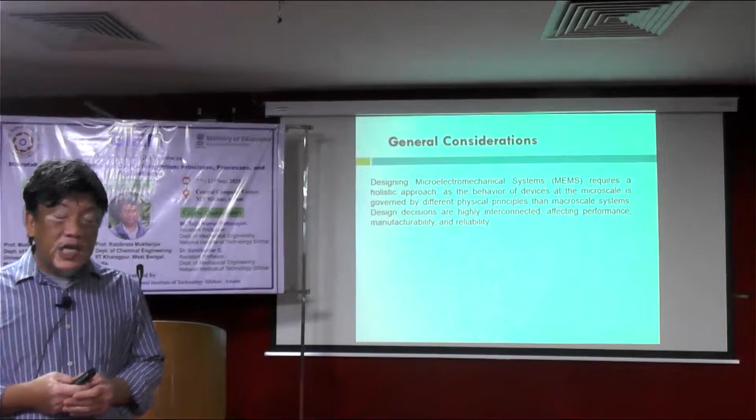As discussed previously, we know that at the micro scale or nanoscale, Newtonian mechanics does not function as what we understand at the macro scale. So at the micro scale or nanoscale, if we do not consider accordingly, we won't get the intended performance of the device, because some of the properties of the material change at the micro scale, and we don't get the exact property as at the macro scale. Then the intended device performance won't be obtained.

So then we have to look firstly at the material selection. The choice of materials fundamentally dictates device performance, fabrication process, and reliability. Just now we had a look at silicon itself. Silicon is the most common MEMS material due to its well-established fabrication process inherited from the semiconductor industry. It is lightweight, has excellent mechanical properties, elastic, no creep below 800 degrees Celsius, and allows for integration of electronics on the same substrate.

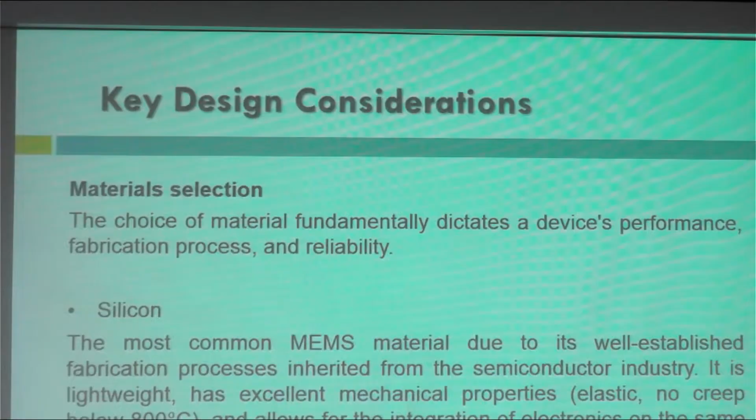I've been talking about making a circuit design on top of the silicon substrate. So this is the meaning here. The integration of the electronics or the electrical circuitry on the substrate itself is important. In macro scale devices, we can have the electric circuitry with wired winding on the device, or an electronic circuit outside of the device, etc. But for micro scale devices, we need to layer the electrical circuit on the surface because we want to maintain the small structure and make it accessible for the small places of the intended application.

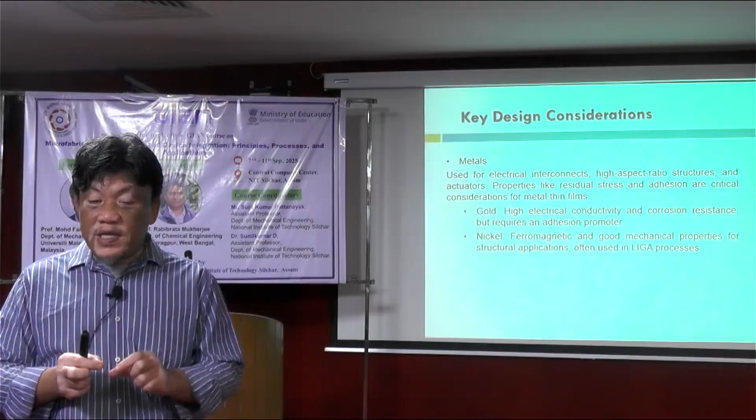Single crystal silicon is highly stable but anisotropic, with properties that vary based on crystal orientation. Polysilicon is a versatile material used for structural layers in surface micromachining. Its properties depend on deposition conditions. Metals are used for electrical interconnects and, as we have discussed, high aspect ratio structures. High aspect ratio means, let's say, long-standing materials, where the width and the length are very different in size.

Properties like residual stress and adhesion are critical considerations for metal thin films. For example, gold has high electrical conductivity and is corrosion resistant, but requires an adhesion promoter. As we discussed, if we use chromium, we can get good adhesion with the surface. Nickel is ferromagnetic with good mechanical properties for structural applications, often used in the LIGA process.

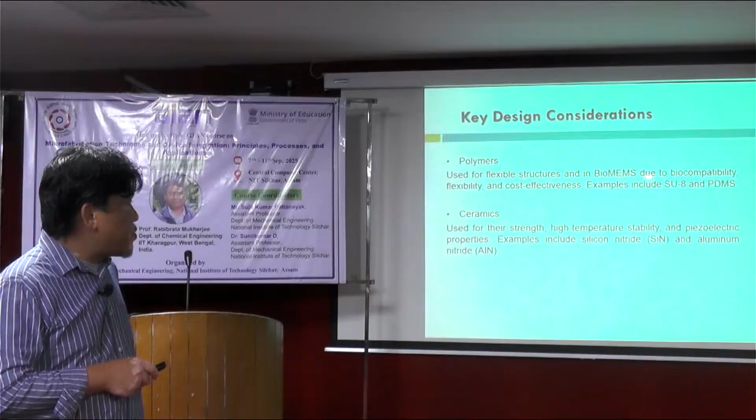Polymers are used for flexible structures and in BioMEMS due to biocompatibility, flexibility, and cost effectiveness. Examples of polymers are SU-8 and PDMS. These are quite common materials in MEMS and BioMEMS applications. You can make a structural design using this kind of material because of its high viscosity. Ceramics are used for their strength, high temperature stability, and piezoelectric properties, for example PZT, PbZrTiO3. Examples include silicon nitride and aluminum nitride.

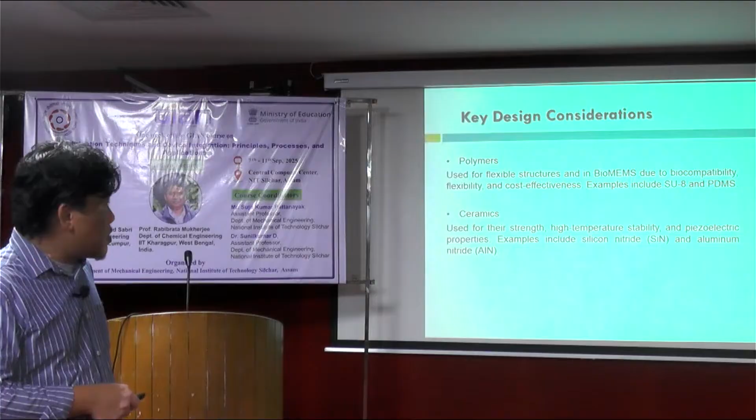Another consideration, which we have gone through in a previous class, is scaling laws. When we design something at the micro scale, as I keep mentioning, at the micro scale physical phenomena scale differently with size, meaning that a design cannot simply be scaled down from the macro world. If you think that you design something at the macro world, then just shrink everything and it will work as it does at the macro world, you are wrong, basically. You have to alter the design and consider different materials to make it work, because the properties change significantly when you scale down in size.

Surface to volume ratio: as devices shrink, surface area dependent forces such as friction, adhesion, and surface tension become dominant over volume dependent forces like inertia, mass, and weight. This is critical for actuators, microfluidics, and heat transfer.

So we had a look yesterday at how the properties of the material are affected when you scale down the size. Some properties change 1,000 times. For example, force changes 1,000 times when you make the device 10 times smaller in size. That significantly reduces the forces that can be exerted by the device itself. Then you need to think about how you can get sufficient forces if you design something small.

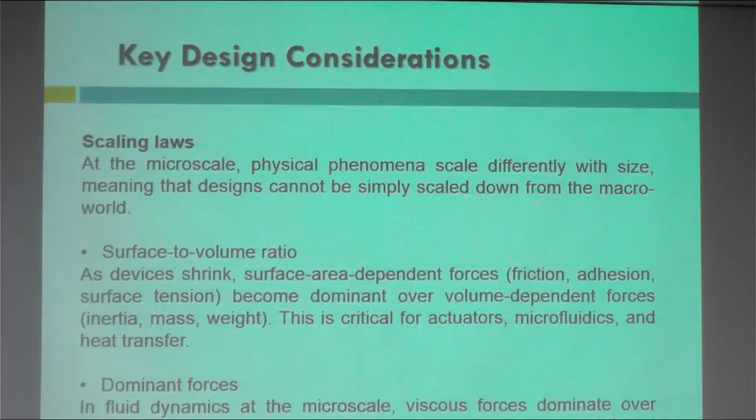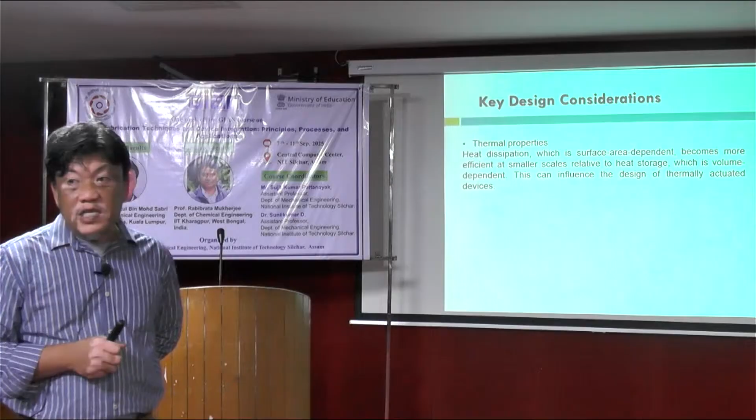And thermal properties: heat dissipation, which is surface area dependent, becomes more efficient at smaller scale relative to heat storage, which is volume dependent. This can influence the design of thermally actuated devices. For example, when I showed you yesterday the inkjet ejection of liquid with a thermally actuated actuator, if it's very small, you can heat up the materials quite fast. Deforming the material at a faster rate makes it possible to use a high frequency inkjet printer.

But the thing is, at the small scale, you can heat up something quite fast, but the heat will also disperse quite fast. So those are the things that need to be considered in the design related to thermal properties of the material.

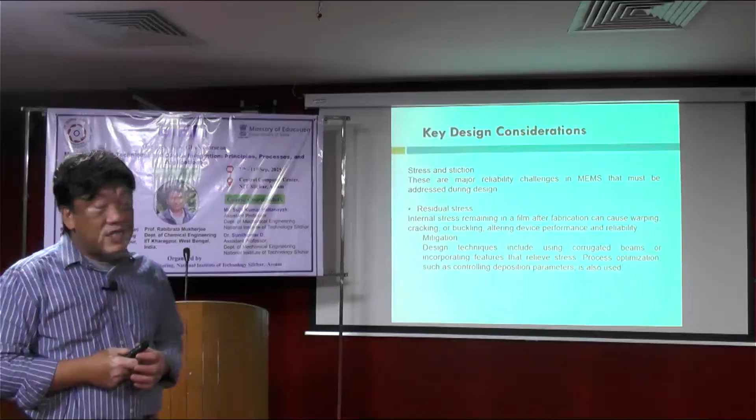And stress and stiction. These are major reliability challenges in MEMS that must be addressed during the design. The stress on the structure is different. And stiction means it tends to attach to the surface, so it sticks. Something very small easily sticks to the surface of a material, so stiction prevents things from moving. That is something you need to consider when you design a very small device or structure.

And residual stress: internal stress remaining in a film after fabrication can cause warping, cracking, or buckling, altering device performance and reliability. As I mentioned in the previous lecture, residual stress depends on the fabrication process parameters as well. If you want to reduce or mitigate the residual stress, design techniques include using corrugated beams or incorporating features that relieve stress, and process optimization, such as controlling deposition parameters, is also used.

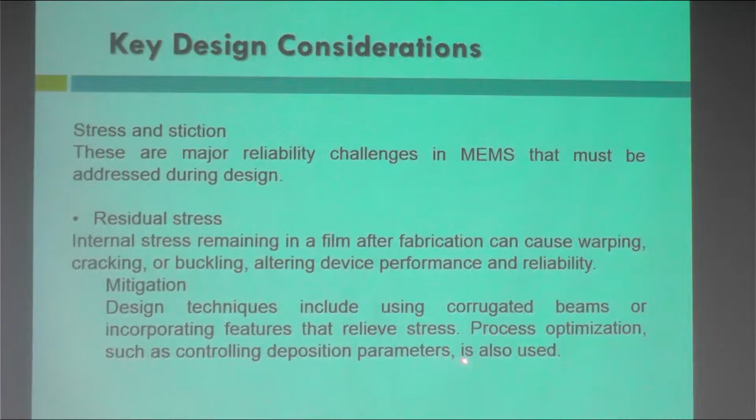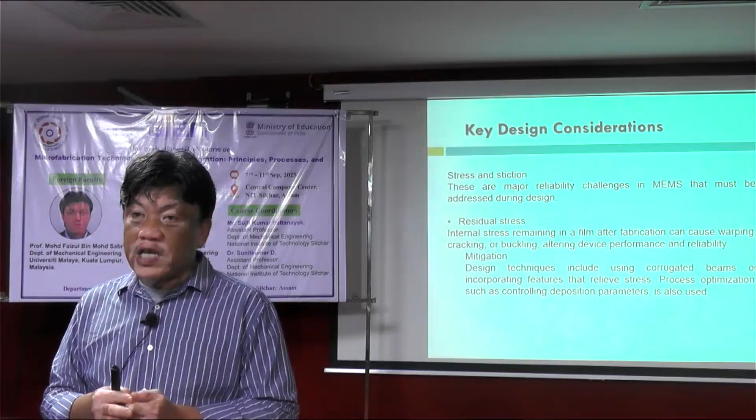So this is what I've mentioned before. This needs to be a recipe that is already established, or if it's a new process, we need to optimize the process itself in order to get low residual stress materials or acceptable residual stress.

And stiction, the unwanted adhesion of released microstructures to the substrate or other parts due to surface forces. It is a primary cause of device failure. When stiction happens, your actuator may not be able to release from the surface, for example, because it's stuck or kind of glued to the surface. That is the thing we have to prevent.

The mitigation: surface modification, applying anti-stiction coatings, for example hydrophobic monolayers, can reduce surface energy and adhesive forces. Surface texturing, increasing the surface roughness, reduces the contact area between components, thereby reducing stiction. And mechanical design, incorporating spring-like structures or bump stops, can prevent stiction upon contact.

Let's say you have an actuator that forces something to go to a certain surface. If it touches, you have a spring property of the material to come back to its original position. That is one strategy in terms of mechanical design.

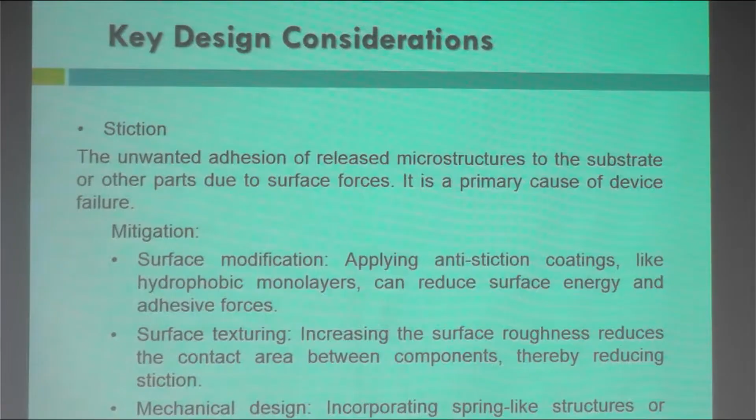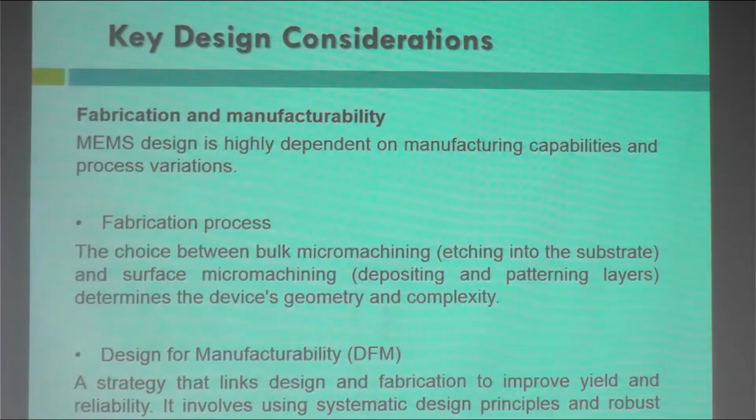And another key consideration is fabrication and manufacturability. So how easy you can fabricate, how difficult it will be if you choose certain design or certain materials. So MEMS design is highly dependent on manufacturing capabilities and process variation. So in MEMS design, basically you have a number of processes that are already established within the use of semiconductor. So you try to use these processes as far as you can in order to prevent unnecessary hassle.

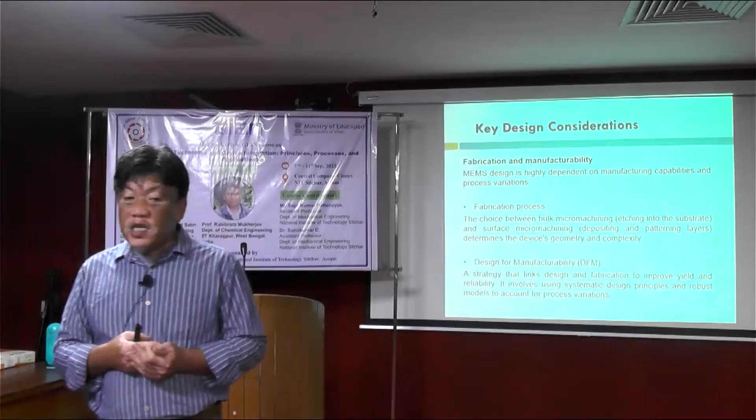In the machining process, for example, you use forces in removing materials. Let's say you do drilling, you do cutting using a lathe, for example. But for MEMS process at the small scale, we can say that the MEMS devices are fragile in comparison with the macro scale devices. So you want to avoid the application of forces to the materials as much as you can. So you want to stick with the processes already established within the semiconductor process in order to make sure that you can fabricate the materials or the device successfully.

So fabrication process, I mean, once we design the device or the micro devices, we have to have in mind the process flow, what to do and how to create what kind of structure. So that will make sure that the device will go through the semiconductor process which is already established, without going into, let's say, a mechanical process of drilling, etc.

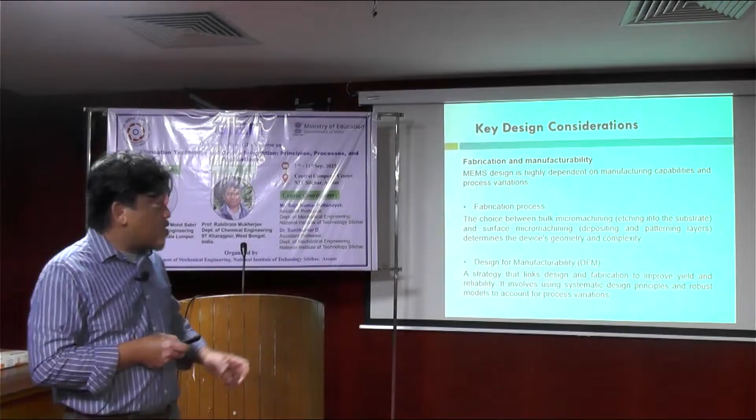So fabrication process: the choice between bulk micromachining, etching into the substrate, for example, and surface micromachining, depositing and patterning layers, determines the device geometry and complexity. So because it's a small scale, it's always complex devices. You cannot simply handle the microstructure by hand, but you need to handle it with care. In terms of process, most of the time we need to see under the microscope because of its small structure. So the naked eye will be difficult.

So that's where you need to design accordingly, even if the structural design is difficult for you to fabricate, basically because the origin of the MEMS process is basically semiconductor process, which is surface micromachining, or 2D. So design for manufacturability is part of the consideration, a strategy that links design and fabrication to improve yield and reliability. It involves using systematic design principles and a robust model to account for process variation. So sometimes a certain process does not work, and sometimes you need to redesign your process steps in order to obtain a certain structure.

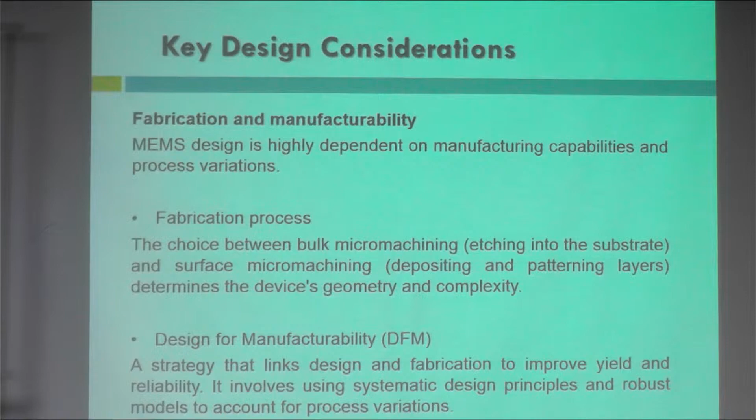So process imperfection, manufacturing tolerance, such as variation in beam thickness or photolithography alignment, can impact device performance. Designers must model these imperfections to predict their effects. By design, let's say we want to produce a 50 micrometer thickness of beam. But in the process, we have to go through masking, etc. Sometimes the process parameters are not as accurate as what we want, then there is a variation, and we cannot obtain the size as intended. The 50 micrometer might be 40, less than what we want, or it might be bigger, maybe 60 micrometer in thickness of the beam. So we have to consider this kind of variation when we design something.

But sometimes the process is well established. We know that if we want to obtain the size of 50 micrometer, we have to design the process flow, the masking, etc., slightly bigger. For example, if you want to obtain the final beam size of 50 micrometer, you have to make your photomask design like 55 micrometer, slightly bigger. So that might be something an experienced MEMS fabricator can do.

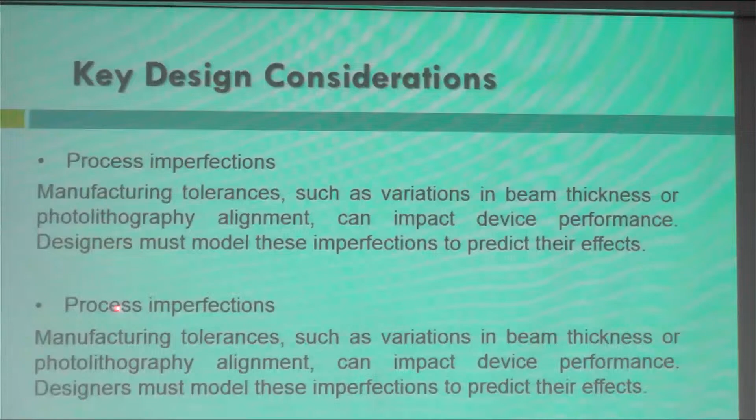So packaging: unlike macro devices, MEMS often require special packaging to function properly while protecting sensitive components from the environment. So as I mentioned before, MEMS need to be packaged because of their small nature.

You want to prevent it from a shock, you want to prevent it from the environment, for example, to protect it from even dust, then you need to have a proper packaging. Functional requirement: the packaging must allow for sensing or actuating functionality of the MEMS device, which often means exposing it to the external environment. This creates a conflict with the goal of protecting the internal electronics. So this kind of trade-off you have to consider.

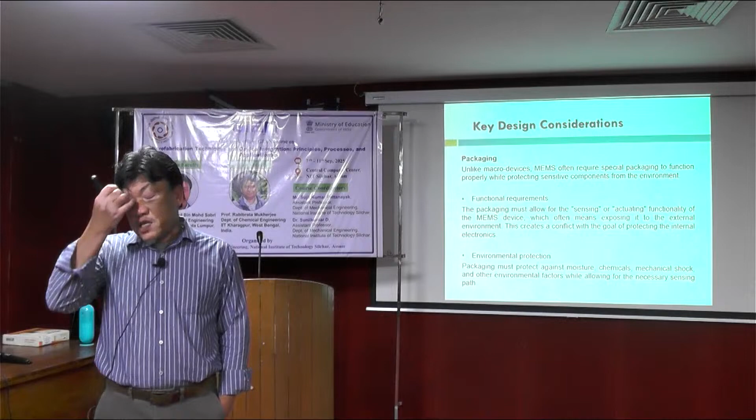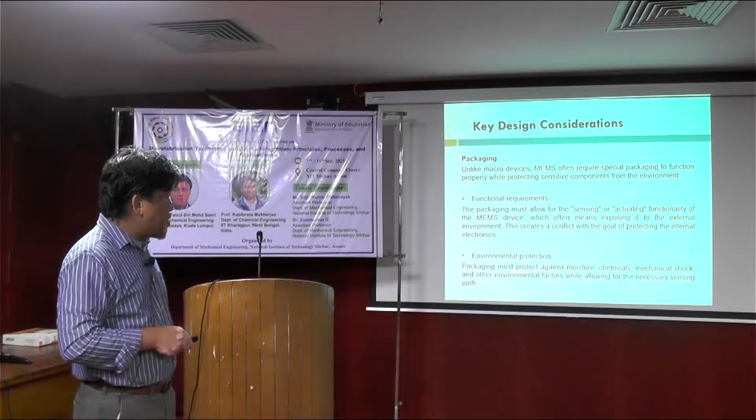You want it to function. Let's say your MEMS speaker, for example, some parts need to be exposed so that it will behave like a speaker and you can hear the voice, but to a certain extent, some of the small parts you need to protect with the packaging. So that kind of thing needs to be considered. And environmental protection: packaging must protect against moisture, chemicals, mechanical shock, and other environmental factors while allowing for the necessary sensing path.

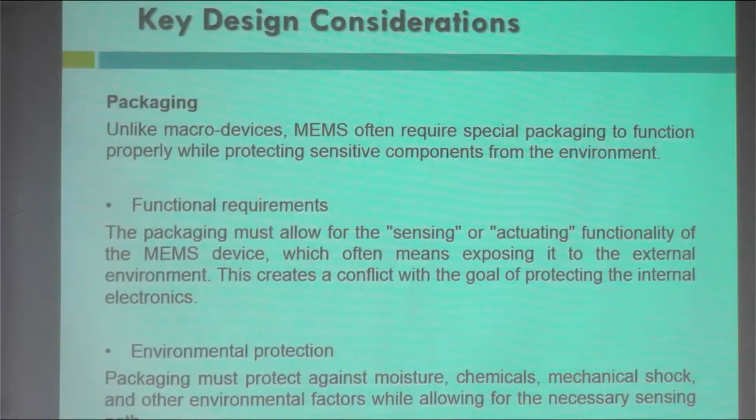Another design consideration is the material properties. We have been talking about this as well. Coefficient of thermal expansion: a mismatch between the MEMS die and package material can induce significant mechanical stress and affect performance. Material selection for packaging must minimize this mismatch. So you have different materials. Let's say your packaging is something like polymer. Polymer does not expand that much. And some parts of your MEMS device might use certain metals as the structure, and the expansion of the metals is higher with temperature.

So this mismatch of thermal expansion will create stress to the packaging and to the microstructure of the device itself. So this kind of material mismatch in terms of thermal properties needs to be considered, on how you can release it or make sure it won't break when it happens, or in a controlled environment of the operation. And package type options range from standard, cost-effective, full mold packages for consumer products to more stable, higher performance cavity or hermetic packages.

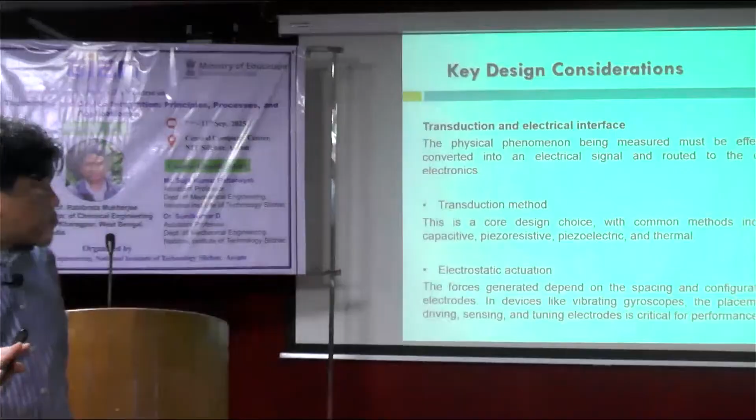So in application, if you want to move something, it becomes an actuator. But if you want to sense a movement with capacitive, you can sense how much it moved. It goes the same with piezoresistive, piezoelectric, and thermal. We know that piezoelectric will have a sensing property. When you provide electrical current to the piezoelectric material, the material will expand and it becomes an actuator. But if you apply strain to the material, you can get sensing because it induces electricity. It's the same with thermal.

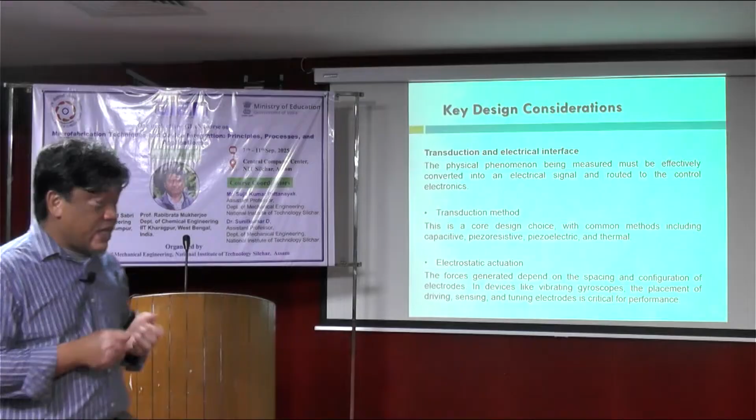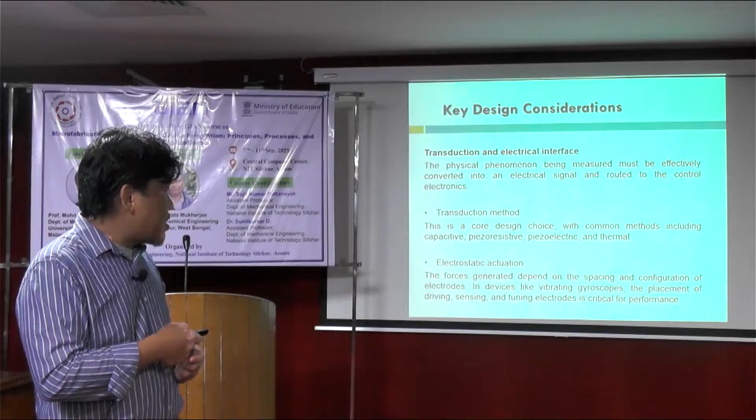Electrostatic actuation: the forces generated depend on the spacing and configuration of electrodes. In devices like vibrating gyroscopes, the placement of driving, sensing, and tuning electrodes is critical for performance. I think we had a look yesterday at electrostatic actuation and some examples of the comb drive actuator. A comb drive is basically an electrostatic actuator. With a comb drive, you can have different configurations for getting the electrostatic forces. With more integrated comb electrodes, you can have higher forces.

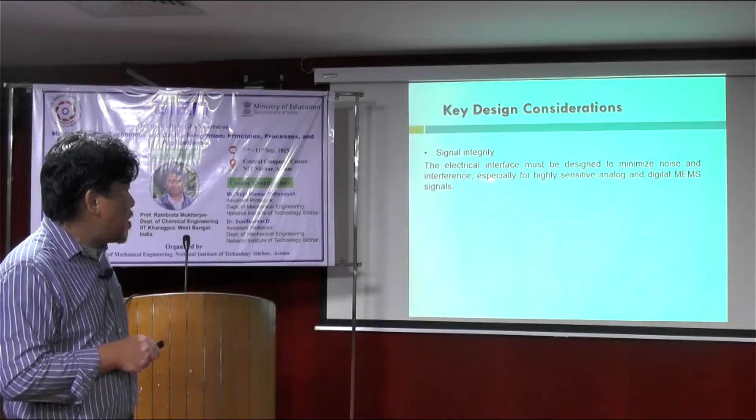And signal integrity: the electrical interface must be designed to minimize noise and interference, especially for highly sensitive analog and digital MEMS signals.

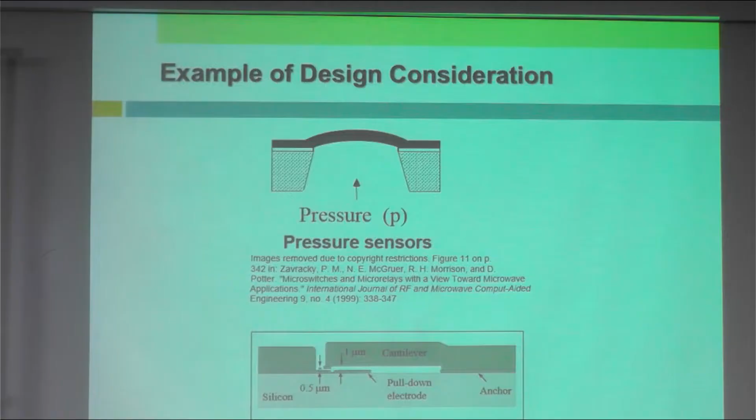And we look into elasticity of the material: the ability of a body to deform in response to applied forces and to recover its original shape when the forces are removed. If we talk about the diaphragm here, it deforms with pressure change. So how elastic is it to come back to its original position, and whether it will go through fatigue or maybe plastic deformation, is something you should consider as well. This contrasts with plasticity, which describes permanent deformation under load. Beyond the elastic deformation, some materials experience plasticity, and the shape won't come back to its original shape.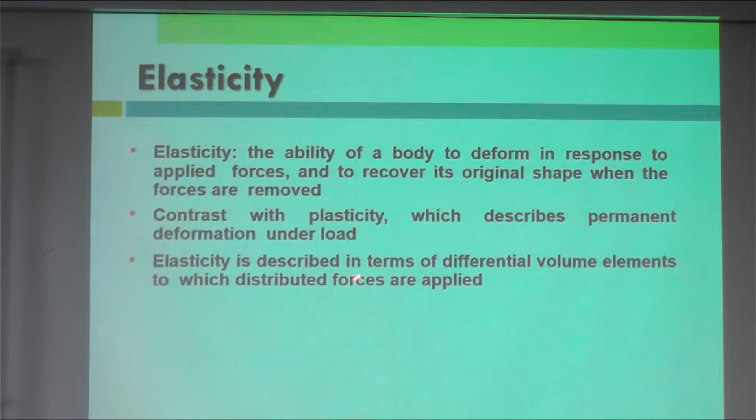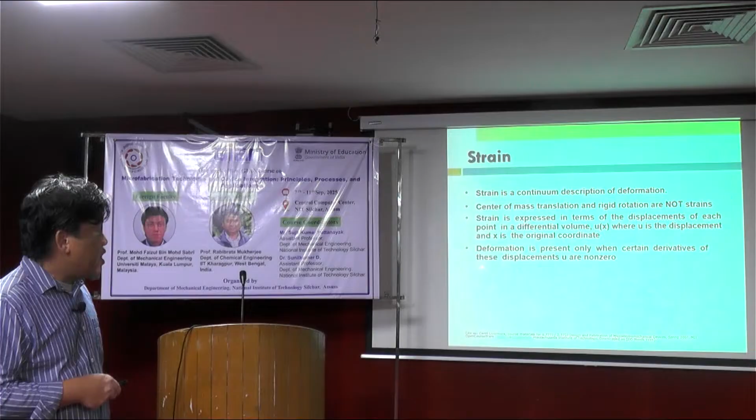Elasticity is described in terms of differential volume elements to which distributed forces are applied. So we have to look into the strain. Strain is a continuum description of deformation, and center of mass translation and rigid rotation are not strain. Strain is expressed in terms of the displacement of each point in a differential volume, where u is the displacement and x is the original coordinate. Deformation is present only when certain derivatives of this displacement u are non-zero.

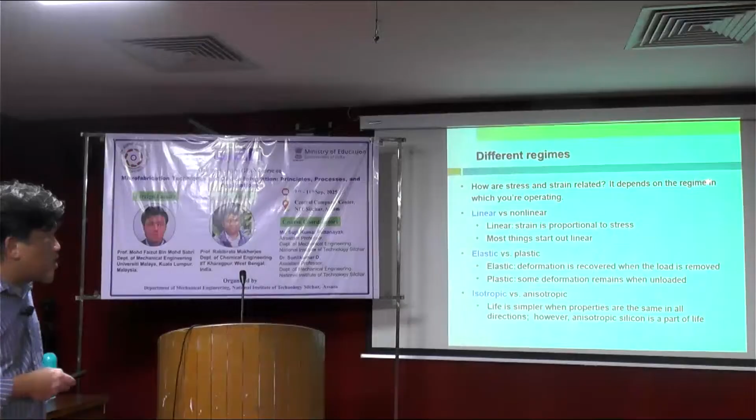So how are stress and strain related? It depends on the regime in which you are operating. Linear versus non-linear: in linear, strain is proportional to stress, and most things start out linear. Elastic versus plastic: elastic is when deformation is recovered when the load is removed, and plastic is when some deformation remains when unloaded. So if plastic deformation happens, the device won't work as intended.

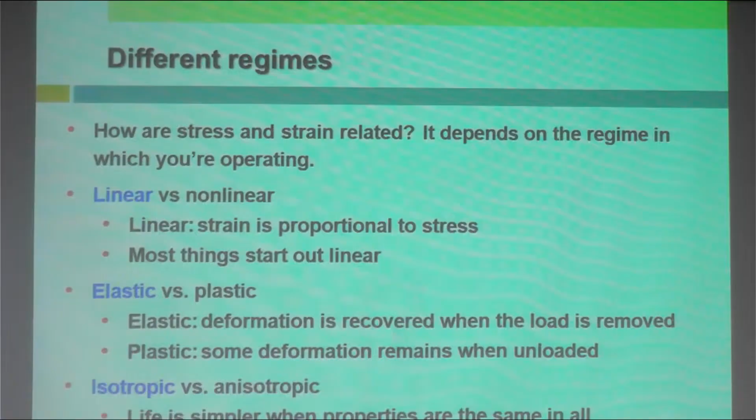Isotropic versus anisotropic. Life is simpler when properties are the same in all directions. However, anisotropic silicon is part of life, because single crystal silicon has a fixed orientation, and different sides of the silicon will give you different properties. So if you want to etch the silicon into shape, you have to consider the orientation of the crystal. That's where identification of the crystal orientation from the beginning will be crucial.

Thin film stress: a thin film on a substrate can have residual stress, whether intrinsic stress or thermal stress. If you deposit a thin film with a certain process, the addition of this film on the substrate will have a certain stress, called intrinsic stress, due to the process. This is mostly described as a plane stress. Especially at the edge, if stress happens, you will get warpage at the edge of the thin film. That is what happens with intrinsic stress.

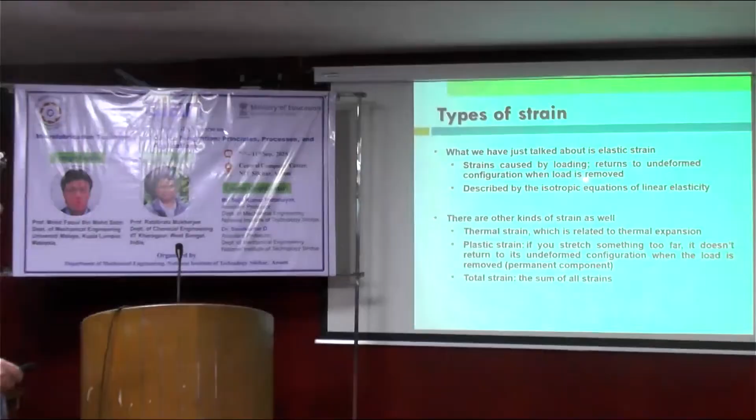So what we just talked about is elastic strain: strain caused by loading that returns to the undeformed configuration when the load is removed, described by the isotropic equation of linear elasticity. There are other kinds of strain as well.

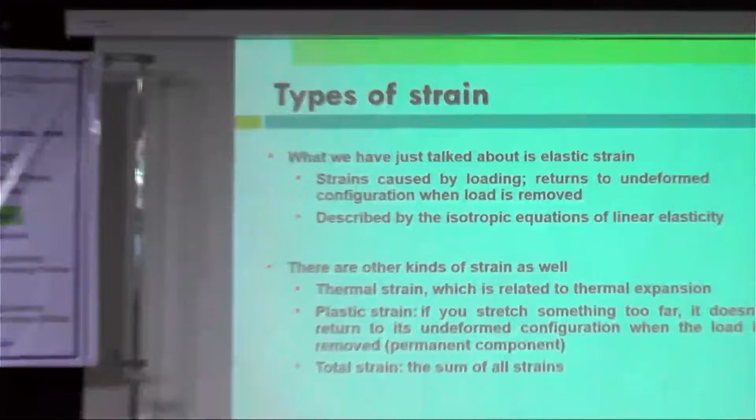Thermal strain is related to thermal expansion. When thermal expansion happens, some materials have a thermal strain where they don't go back to their original position or shape. Plastic strain: if you stretch something too far, it doesn't return to its undeformed configuration when the load is removed.

Total strain is the sum of all these strains. Some devices experience total strain - intrinsic strain, thermal strain, etc. - which then affects the performance of the device as well.

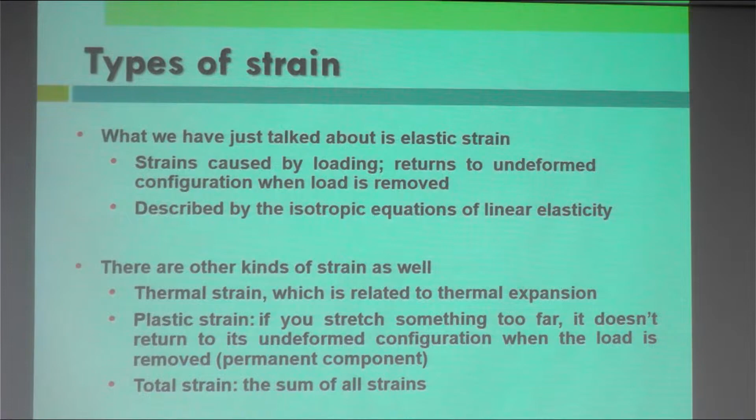Thermally induced residual stress: if a thin film is adhered to a substrate, a mismatch of thermal expansion coefficient between film and substrate can lead to stress in the film, as we discussed before. You have different materials with different thermal coefficients of expansion. If the device experiences thermal or heat, the expansion is different between your substrate and deposited thin film, so thermal strain will happen. The mismatch in coefficient of thermal expansion causes this.

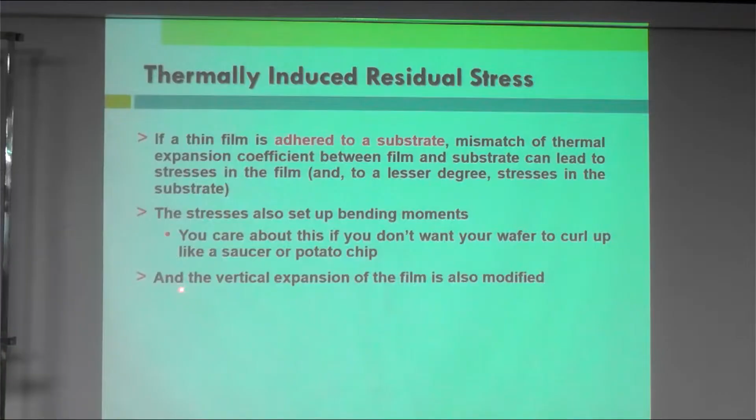The stress also sets up bending moments. You care about this if you don't want your wafer to curl up like a saucer or potato chips. Because you make it into a thin film, the strain of your deposited film might cause warpage or bending of the surface of the material. That commonly happens if you don't take care of this from the beginning. The vertical expansion of the film is also modified.

Intrinsic residual stress: any thin film residual stress that cannot be explained by thermal expansion mismatch is called intrinsic stress. One source of intrinsic stress is deposition far from equilibrium, meaning when you deposit the thin film, it's not in the equilibrium state.

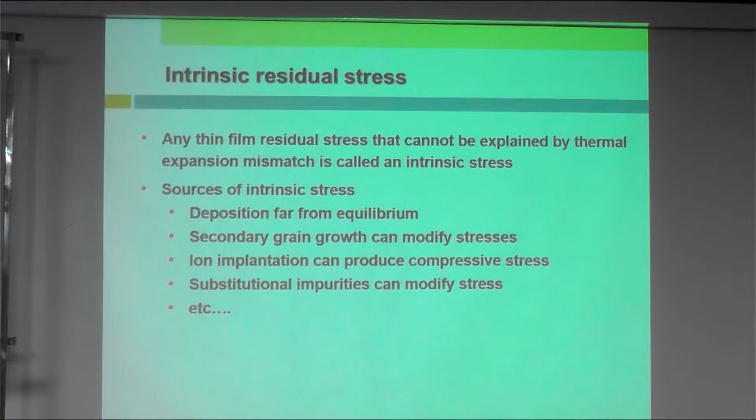Secondary grain growth can modify stress as well - you grow the material layer by layer, but secondary growth, for example the next growth, modifies the stress of the thin film. Ion implantation can produce compressive stress, and substitutional impurities can modify stress. It's not easy to control purity; sometimes different elements get included in the material, and even a small amount can change the properties of the material.

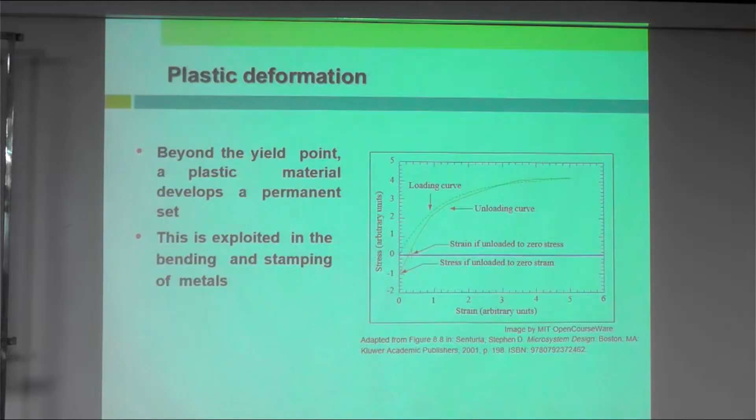Then we talk about plastic deformation: if the material experiences deformation beyond elastic deformation, it will go into the plastic region and won't come back to the original shape. Beyond the yield point, a plastic material develops a permanent set, which is exploited in the bending and stamping of metals. This can be useful, but in the device itself it depends on the intended performance and capability.

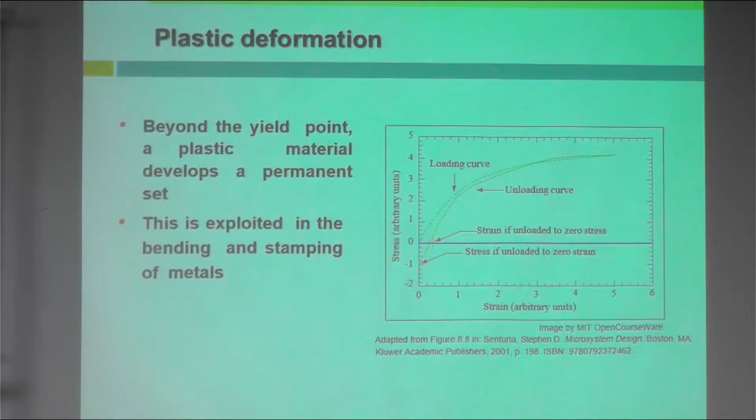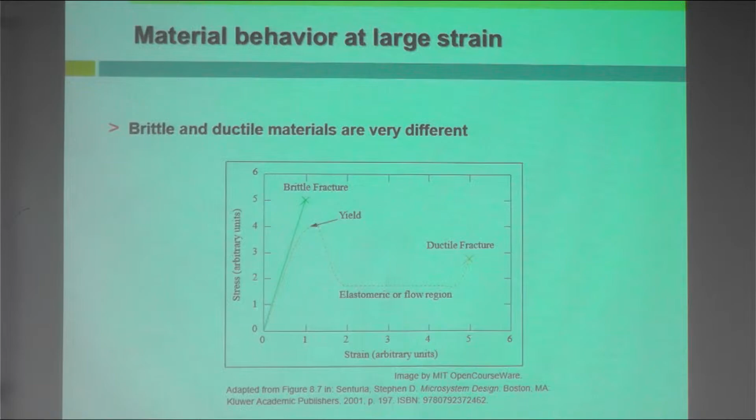Brittle and ductile materials: for example, silicon is basically brittle - hard and brittle - so you don't want to drop silicon because it will shatter like glass. If you want to use a material more carefully, you have to consider its brittleness and the intended application. If it's ductile, you have to look into the region for plastic deformation.

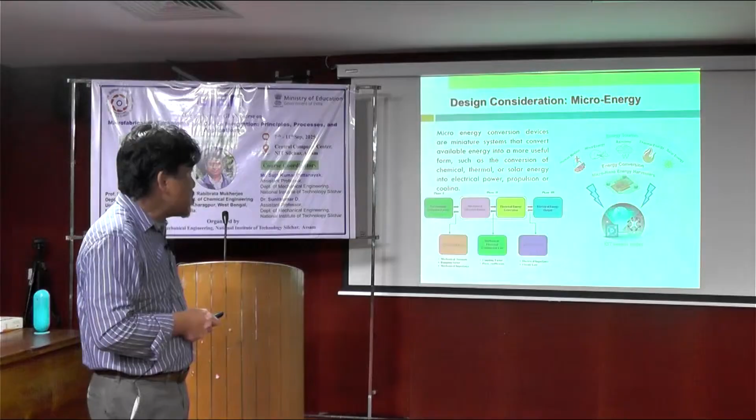I would like to share an example of the design consideration of a device called microenergy scavenging. In this device design, we have to consider a few things in the early stage, both for the process itself and for the intended application.

For the intended application, I'm going to share a device called microenergy scavenging, a microenergy conversion device - a miniature system that converts available energy into a more useful form, such as the conversion of chemical, thermal, or solar energy into electrical power, propulsion, or cooling.

We can have a lot of this kind of device at the small scale. People try to design energy scavenging devices using piezoelectrics, where you have a strain or vibration that you convert into electricity. It can be as small as nanowatt or nanoampere, with different energy sources. In piezoelectric, the strain, vibration, or deformation can happen by any means that deforms or provides strain to the materials.

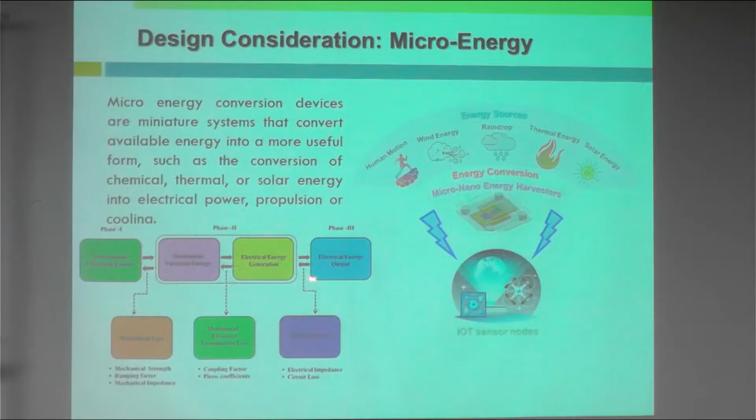Electrical energy output is actually what you want in terms of energy scavenging. And of course, in the conversion, you need to consider the amount of energy that can be harvested, and how much you can convert into useful energy or electricity.

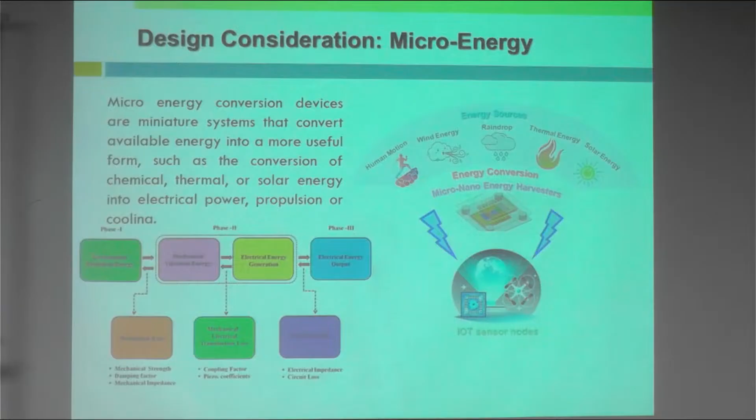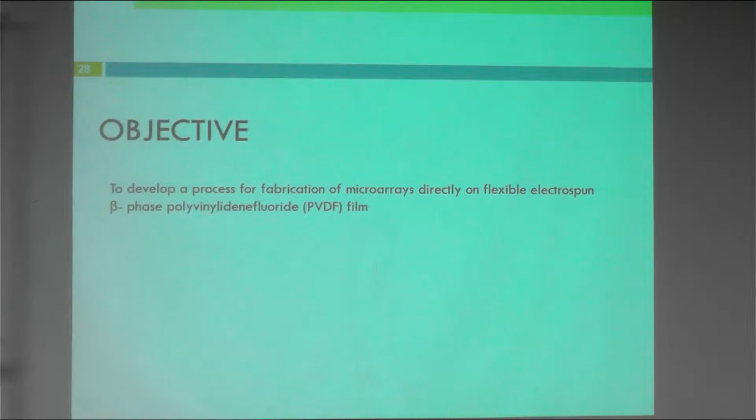The objective of this device is to develop a process for fabrication of microarrays directly on flexible electrospun beta phase polyvinylidene fluoride PVDF film. Why is the objective important? Because you want to determine your device size, device structure, device materials, etc.

So here you see it's a microarray. Why a microarray? Because this is about a small device. PVDF alone converts into useful energy very minimally, very small. With a microarray, you can combine arrangements like a battery in series, so that you can get higher power output. And flexible electrospun beta phase is basically the best phase of PVDF in terms of producing electricity.

The material used is PVDF, polyvinylidene fluoride. PVDF and its copolymers are one of the most extensively studied polymers for piezoelectric generators, with high resistivity towards most chemicals - it's quite inert to oxidants and intense ultraviolet light. PVDF has 5 different polymorphs: alpha, beta, gamma, delta, and epsilon.

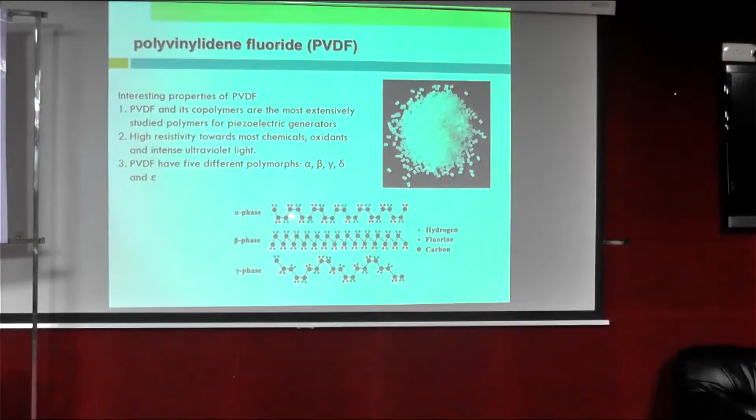So you have different phases of PVDF: alpha phase, beta phase, and gamma phase. With different phases, you get different properties. The property of the phases is important here because you want to use it for energy scavenging or to convert heat into electricity. So you want the best property for heat and for strain, because it's about the pyroelectric property.

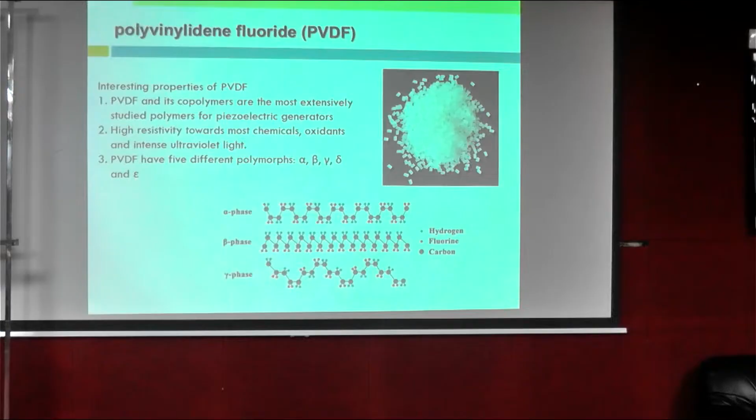So for the most influential and typical phases: in alpha phase, the axis of the chain and the dipole components are anti-parallel, thus neutralizing each other, and the naturally occurring alpha phase is categorized as non-polar and non-piezoelectric. So we want a piezoelectric property, we cannot use alpha phase basically.

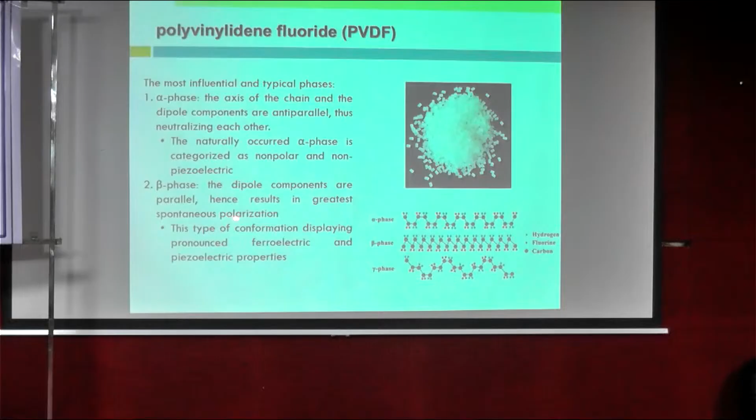In the beta phase, the dipole components are parallel, hence resulting in greater spontaneous polarization. This type of conformation displays pronounced ferroelectric and piezoelectric properties. So basically, that's the reason we choose beta phase PVDF for the selection of material for this energy scavenging device.

Okay, this is the PVDF film synthesis, the synthesis of beta phase content PVDF using electrospinning.

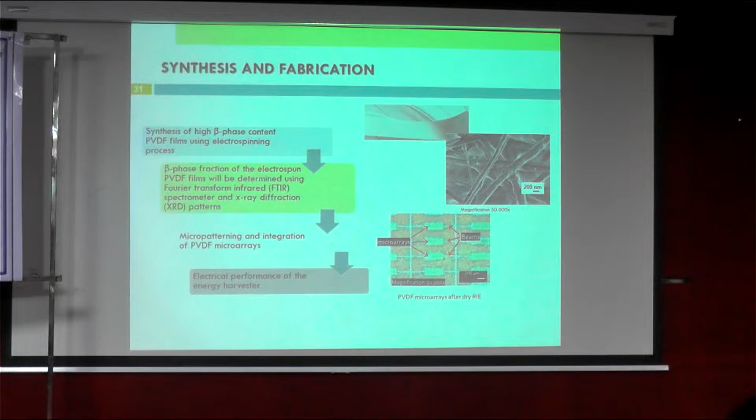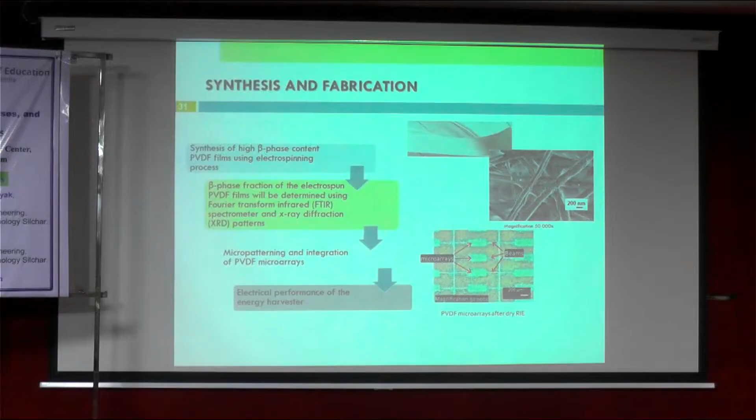I'm not sure if you are familiar with electrospinning. Electrospinning is a process where you apply a high potential between two terminals. You put your liquid PVDF in a syringe, then you control the shearing forces and applied pressure, then you control the potential between these two terminals at high voltage, high potential. Then you can have a strand of nanofibre pulled from the syringe. That is the process of electrospinning.

With this process, basically we'll be able to produce high beta phase PVDF. As you are aware, piezoelectric needs to be poled, the poling process needs to be done. But in this process of electrospinning, the poling can be omitted because the process itself with a high potential is already a process of poling.

So beta phase fraction of the electrospun PVDF film will be determined using FTIR, etc., to confirm the properties, and then with micro patterning and integration of PVDF microarrays, and electrical performance of the energy harvester.

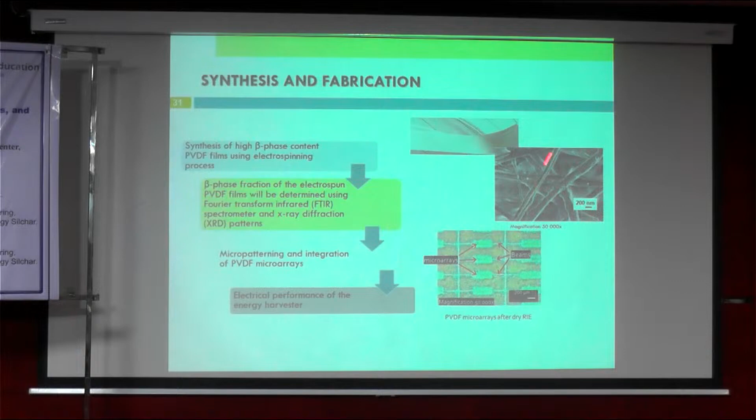So this is the PVDF string or thread. This is the film basically. If you zoom this film, you can see this kind of thread. Then you can make it into microarrays as intended, all connected with circuit with a metal circuit. This has been produced using reactive ion etching to make into a micro scale device.

This is the process of micro patterning and integration of this PVDF microarrays. Basically, we use flexible substrate instead of silicon. The flexible substrate can be a kind of polymer or something, plastic, a suitable material with a certain adhesive, polymer adhesive. You attach the electrospun PVDF on top of this substrate.

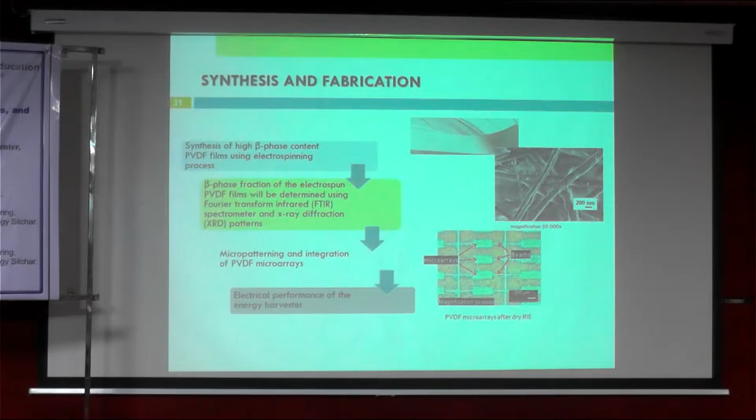Then we use a stencil mask basically to make a pattern. So the pattern intended is like this kind of pattern basically, that's what we want to make. So setting stencil mask, then you make a pattern here with the stencil mask, then you do the micro patterning of this electrospun PVDF.

So you get the shape of the patterning. In order for you to get this shape, of course, you have to remove this material, this electrospun film, using dry etching.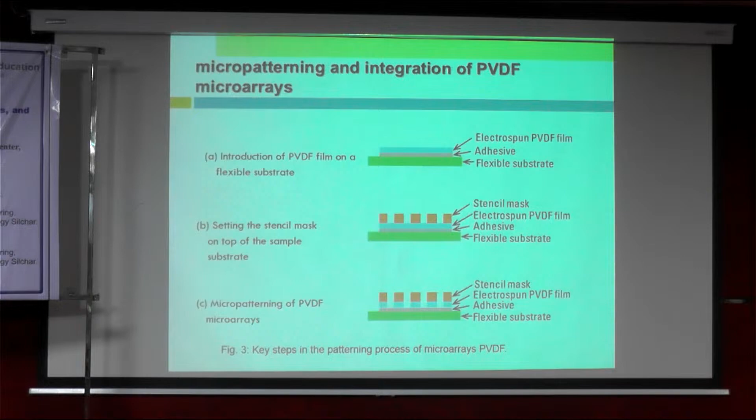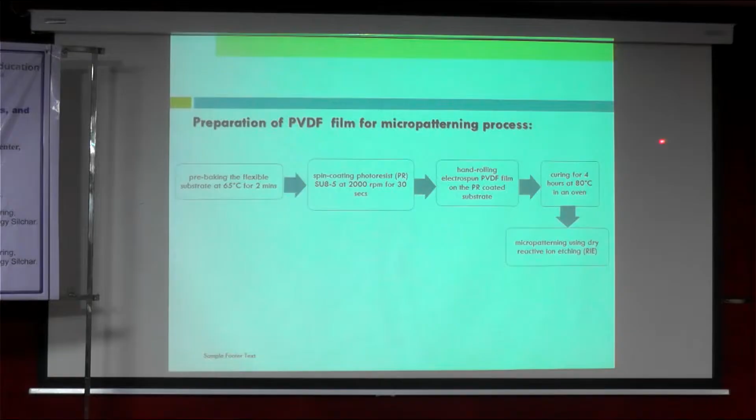So the process in details involves, this is quite normal in terms of micro-device design, to go through this kind of process: pre-baking of flexible substrate at 65 degrees Celsius for 2 minutes, then spin coat photoresist, as I mentioned before. We will look into photoresist properties later on. Then hand rolling electrospun PVDF on the substrate, curing at 80 degrees Celsius, and micro-patterning using reactive ion etching.

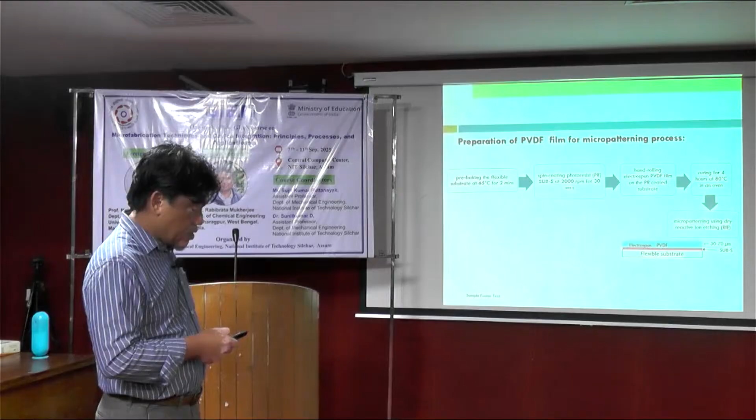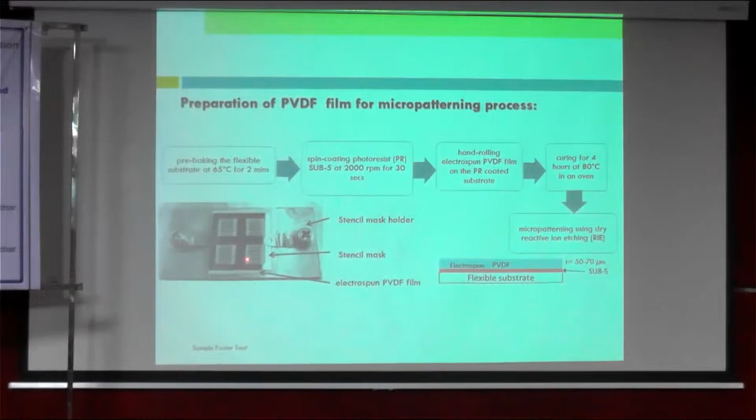So this is the substrate, then you get this kind of mask. Basically this is the mask, stencil mask. Then this is the electrospun PVDF at the bottom of this mask. This is where you try to transfer the pattern of this stencil mask to the substrate. Then you do the reactive ion etching.

Then this is the result. I mean the clamping here to hold the stencil mask, the spacer. You need some spacer, then electrospun PVDF, adhesive. Then patterning of the deep RIE with a gas flow rate of oxygen and pressure, RF power, etc. You do the etching of this PVDF membrane.

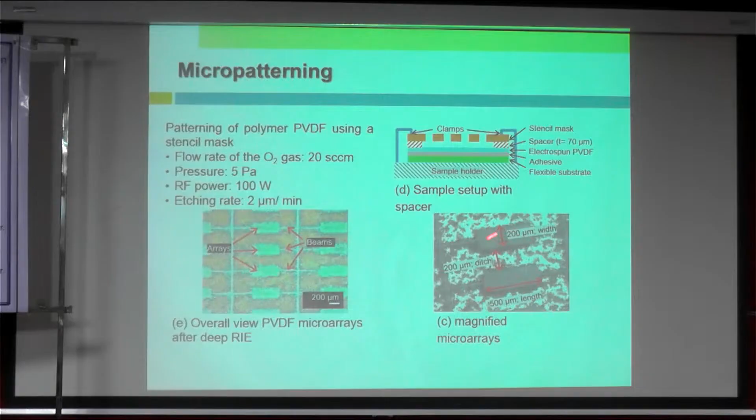Then this is quite important parameters for a certain process, because depending on the material that you are dealing with, the process might have a different recipe. So this is the actual photo, zoomed, with a 200 micrometer width of PVDF. Just imagine, yesterday we talked about our hair with about 50 to 70 micrometers, so this is just slightly bigger, 200 micrometers.

Then you do the testing, because this is a hybrid system, which is piezoelectric and pyroelectric. Piezoelectric, as I mentioned, you can harvest electricity by providing strain to the system, or pyroelectric is about heat - you have a thermal fluctuation, then you can get electricity. Because of the nature of PVDF at beta phase, you can have both piezoelectric and pyroelectric.

So if you blow hot air to the system, you can harvest the heat from the hot air, and also for the blowing of air, the flow of the air, that can provide strain to the material itself. So that will provide a piezoelectric output - beta phase of the material here.

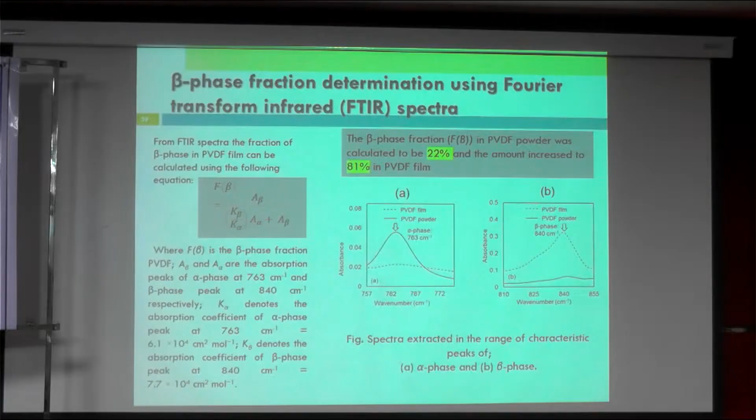Some calculation. So prior to the experiment, you have to calculate basically whether it will work or not to a certain extent, hypothetically, and do some simulation of the micro device. Okay, basically the PVDF film at the beta phase is here as detected by FTIR and XRD.

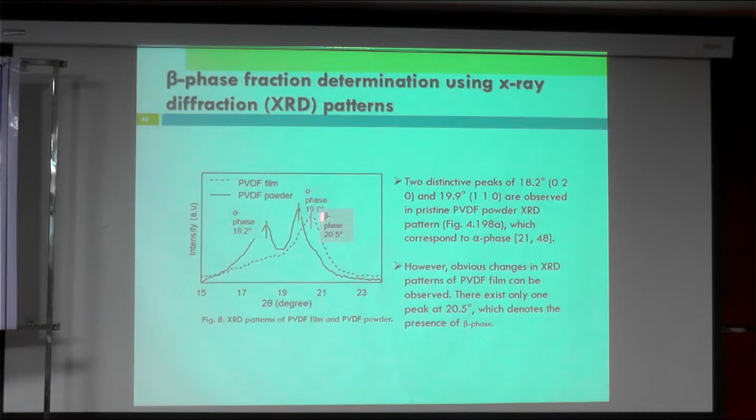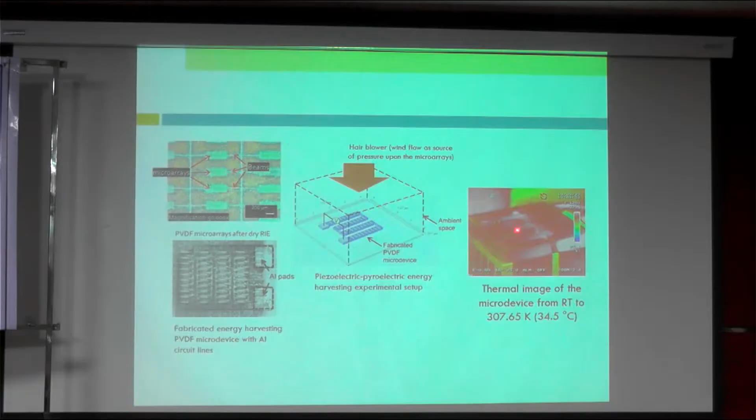So this will be kind of how you can package the system and the setup in terms of this pad. These are aluminum pads for the electrical conductivity, I mean, for you to harvest electricity from the system. And this is an actual thermal camera that tries to look into the applied heat to the system and how you can get the electrical power.

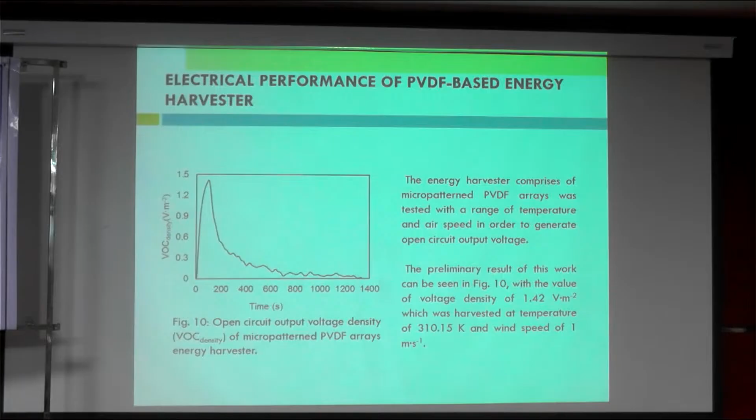So the induced power from this small device, maybe the size of 20 times 20 millimeter, then the open circuit voltage is about 1.4 volt here, the maximum. So that is quite a significant output basically.

But what we designed is a system that can harvest electricity from hot air. So when you blow hot air to this microsystem, you can harvest some electricity that is good enough for you to power certain sensors or an IoT node.

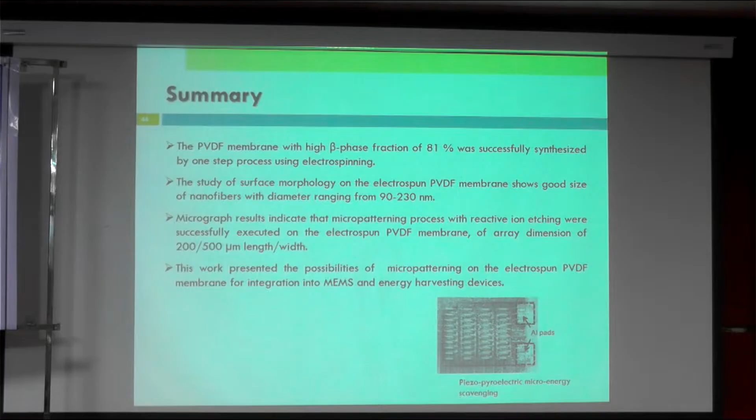Okay, and another consideration in terms of design is for the multi-probe that later on I will share as well in the case study. But just to provide some indication of the design consideration to design this kind of probe, what we have to consider in terms of its capability of making the movement and what kind of materials should be considered from the beginning.

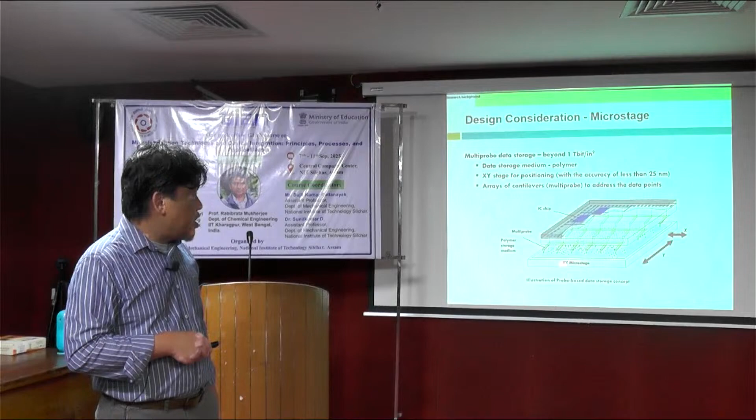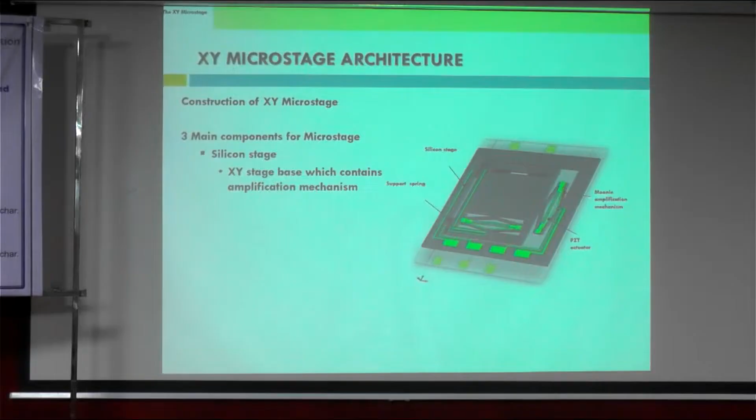Let's say you want to have this as a substrate, what will be the good substrate and what will be a good process and electrical conducting material as well. So I think maybe it's better for me to consider it later.